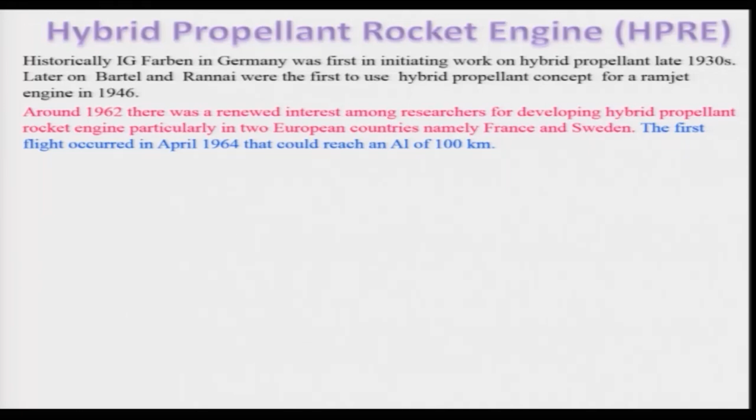After that a lot of work has been done, and developed countries like the USA and Russia and other countries started working on hybrid propellant rocket engines, but I will just mention a few of their milestones. The largest hybrid rocket engine was built around the mid 1980s by AMROC, designed for a space booster using the H500 engine, which could produce a thrust of 312 kilonewton lasting for 70 seconds, and they used liquid oxygen and HTPB propellant in that engine.

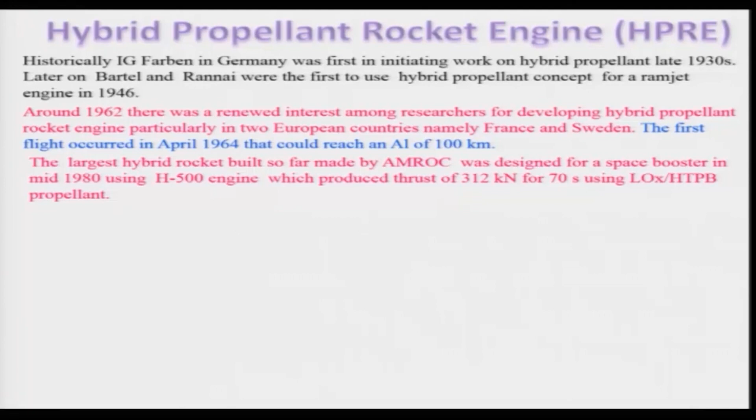There are several programs on hybrid propellant rocket engines across the globe, but unfortunately they are not really being used very much by various space agencies. Let us look at a schematic of a typical hybrid propellant rocket engine shown in this diagram. This is your hybrid propellant rocket engine system.

It has various components like a nozzle, and there is the motor grain, and this portion is your fuel grain, and this portion is your port where the gases will be passing through, and it has injectors, and this total is known as the combustion chamber. The combustion chamber also contains the igniters, and there will be an injector which is not shown here, and the combustion chamber is connected to a feed system.

We have already discussed the feed system in the case of the liquid propellant rocket engine. It is similar to that. Generally, a very simple system is used in this case, as only one liquid line has to be designed. The liquid oxidizer is contained in a tank, and it has to be pressurized using the gas pressure feed system, and this is your gas pressurization tank.

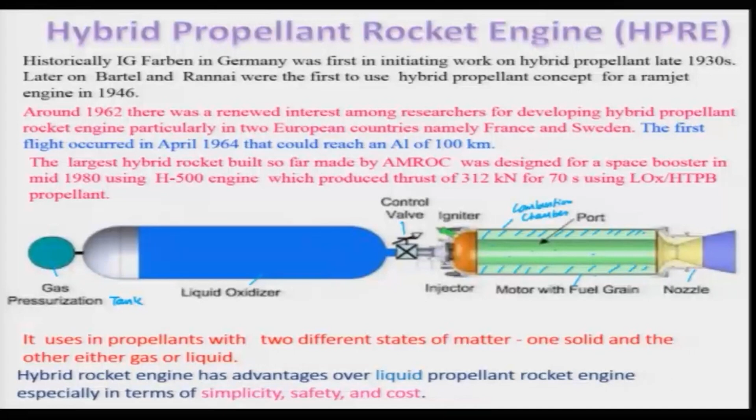So, as I told earlier, the hybrid rocket engine has advantages over the liquid propellant rocket engine, especially in terms of simplicity, safety and cost, as it has fewer components as compared to the liquid propellant rocket engine. Let us now look at the characteristic features of a hybrid propellant rocket engine.

The specific impulse of the hybrid propellant rocket engine lies above the solid propellant engine. However, it will be lower than the maximum value of the liquid propellant rocket engine. And its specific impulse varies even during steady state operation, because of the fact that there will be variation of the oxidizer and fuel mixture ratio along the length and also along the time.

And that is really one of the problems one has to look at, and it has the ability to change the thrust level smoothly over a wider range as compared to the solid propellant rocket engine. Its operation can be switched off and on easily during flight, unlike the solid propellant rocket engine. It has relatively lower system cost as compared to the liquid propellant rocket engine.

It has a higher safety envelope during the storage of propellant and operation of the rocket engine as compared to the solid propellant rocket engine and liquid propellant rocket engine. Its propellant utilization is much lower than that of the solid propellant rocket engine, as a certain sliver of the fuel propellant remains unutilized at the end of its operation.

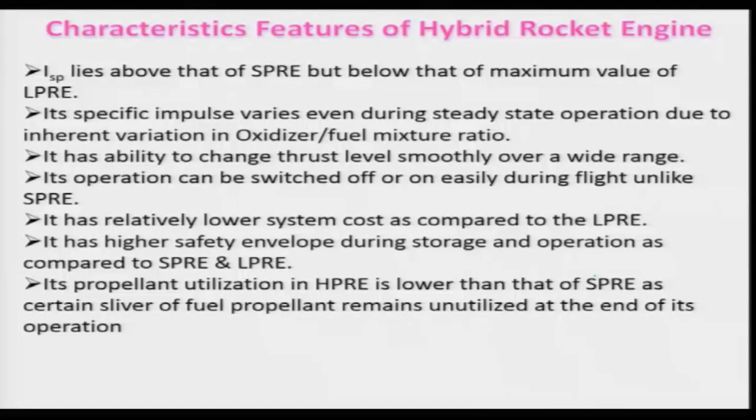So, let us look at a schematic of a typical hybrid propellant rocket engine. I just want to discuss a little bit again. Of course, it will have a combustion chamber with a CD nozzle, and you can see this is your solid propellant grain, and this is the port through which the oxidizer will be coming.

This is your injector plate through which the liquid will be atomized, being fed by the feed system, and there is a spray. Of course, there is an igniter which will ignite the combustion in this combustion chamber. But keep in mind there is another component, known as the mixing chamber, which will not be there in a liquid propellant engine, and that is very important because the fuel and oxidizer have to be mixed and burned properly before getting expanded in the CD nozzle.

Of course, it has a controlling valve as a part of the feed system, and the liquid oxidizer tank has a pressure regulating valve and the high pressure gas tank, and that will dictate how long one can operate this engine. And there is a diaphragm, as I told, and that will separate the liquid oxidizer tank from the high pressure gas, which happens to be inert gas. Generally, inert gas is used.

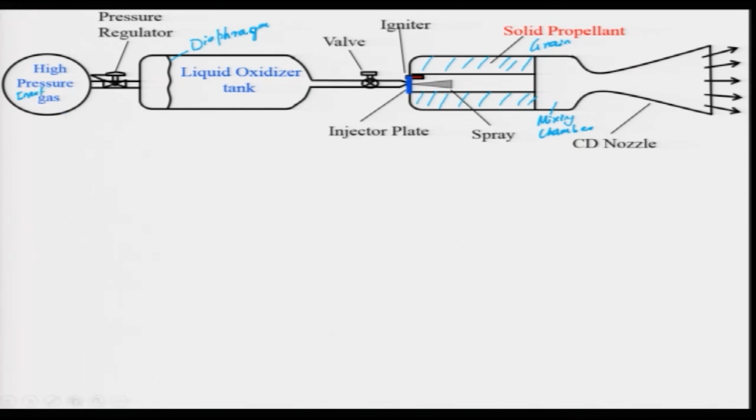And let us look at different kinds of propellants that can be used for a hybrid propellant rocket engine. Some of the fuels being used are polymers, polyethylene, HTPB, that is hydroxyl-terminated polybutadiene, CTPB, paraffins, and several others, and whatever can be used as a fuel in a solid propellant can be used. Whereas the oxidizer generally used is a liquid oxidizer: hydrogen peroxide, nitrogen tetroxide, white fuming nitric acid, red fuming nitric acid, and several others.

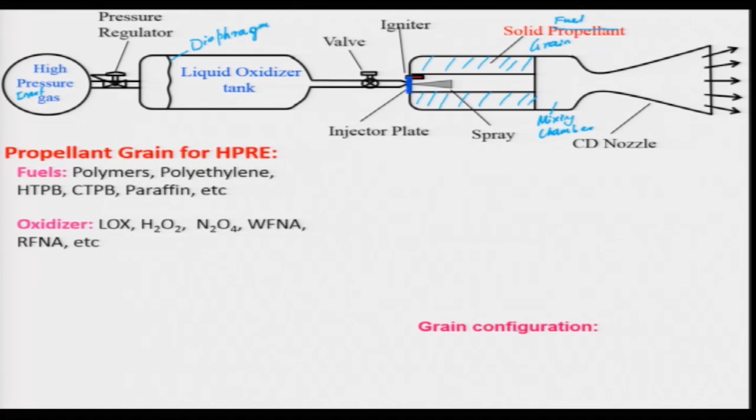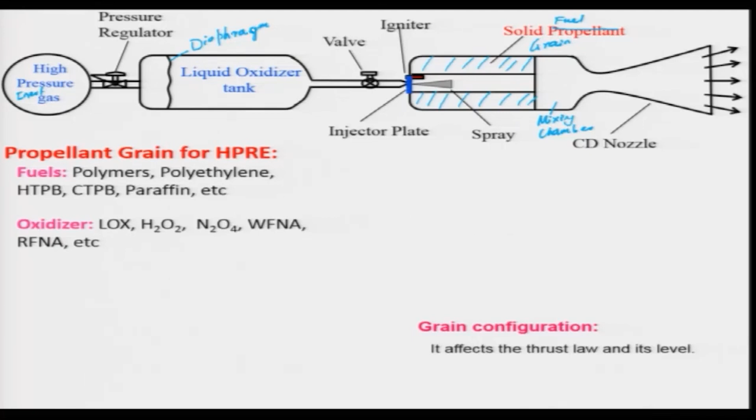And as I told earlier, we need to have the grain, your solid fuel grain. This is basically the solid fuel grain, and the grain configuration will be playing a major role so far as the performance of the hybrid propellant rocket engine is concerned, because it will be dictating the burning surface, and hence it affects the thrust law and its level of producing the thrust.

And let us consider a cylindrical solid fuel grain which is shown here, and in this case this is your oxidizer, and as a result the propellant will be burning in these directions, and the thrust level will be limited by that, and it will be dependent not only on the diameter of this solid fuel grain, but also on the length, and this is your length.

So, if you want to have a higher thrust and the diameter of the engine is limited due to some reason, then naturally one can get higher thrust by increasing the length. So, that is the limitation of the cylindrical solid fuel grain. Hence, the single port grain is not preferred in case of hybrid propellant rocket engine, particularly for high thrust level engines, as its regression rate is almost 3 times less than that of the solid propellant rocket engine. So, therefore, the multi port fuel grain is being designed and developed.

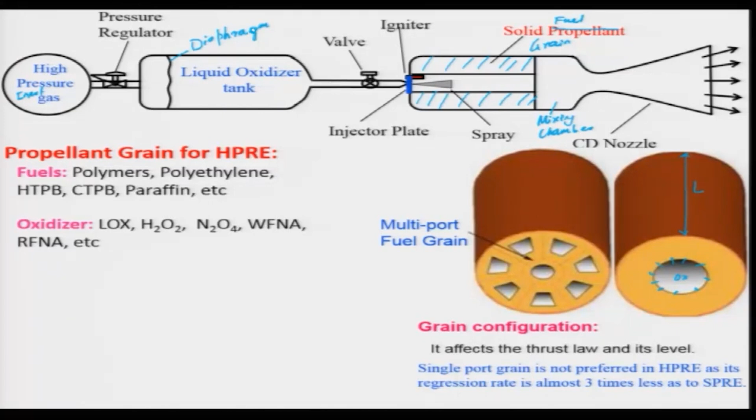So, let us look at a typical multi port fuel grain, and this is having a port at the center, and these are the other side ports having basically a truncated shape, or we call them pie shaped combustion ports. And keep in mind, this is known as web, and if you look at it, the thickness of the web is double here in this case, and when it is burned, naturally this surface will be moving perpendicular to that, and there will also be a round one, and this is the way it will be moving.

Now, the web spacing here to there has to be properly done, and in case these are meeting, this also will be moving in a circular manner, it goes on increasing, moving in the opposite way in this pie shaped combustion port. Naturally, a situation will come that it will be structurally very weak, because it is thinning down towards the end, and it may lead to some kind of falling down on the port itself. So, therefore, one has to be careful in designing these kinds of multi port fuel grains. And for that, of course, one can use a separator kind of thing, so that it will give structural rigidity, that we will be discussing a little later on.

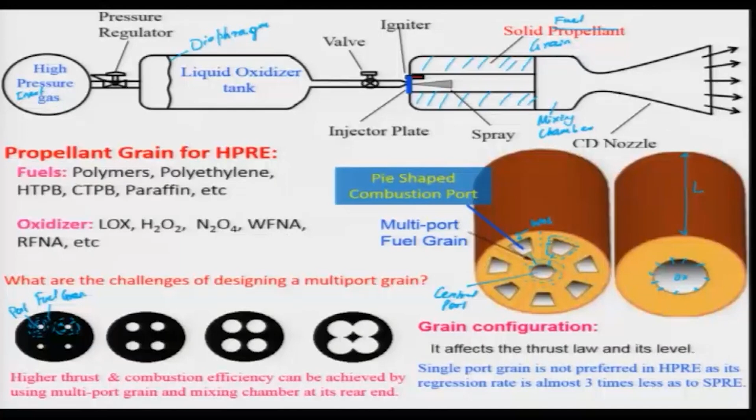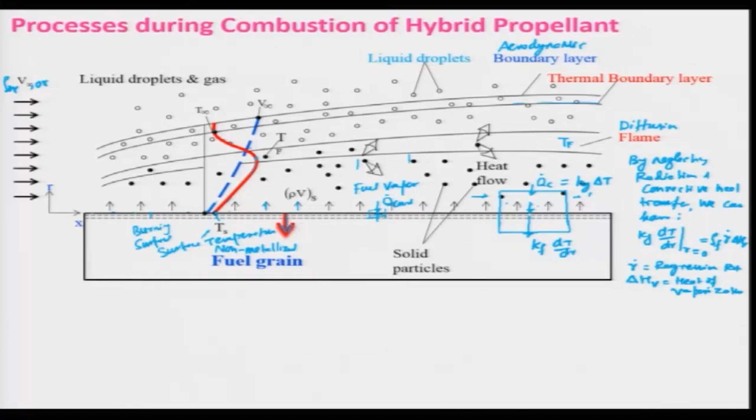And one can also solve the boundary layer equations for energy and for fluid flow, and then derive an expression for regression rate, which is quite complex. But we will look at the experimental results, because the processes are quite complex to model, and people have conducted experiments and come up with a semi-empirical relationship for the regression rate, that is r dot = C G^m, where G is the total mass flux, equal to rho_g v_g, the density of the gas times the velocity of the gas, m is the mass flux coefficient, and C is a constant.

This is a very generic relationship for the regression rate, and for polyethylene and hydrogen peroxide, r dot is equal to 8 G^0.45 centimeter per second. Keep in mind that this is valid for characteristic velocity of 1530 to 1590 meter per second, equivalence ratio phi of 0.1 to 0.2, and chamber pressure of 3 megapascal. So, you cannot really use it for other cases.

Whereas the more elaborate semi-empirical relation for the regression rate is rho_f r dot = 0.038 G Re_x^-0.2 B^0.23, where G is your total mass flux, and B is the ratio of delta h divided by delta H_v. Keep in mind that delta h is the enthalpy difference between the fuel surface and the flame, and delta H_v, as I told earlier, is the heat of vaporization. This is known as the blowing ratio.

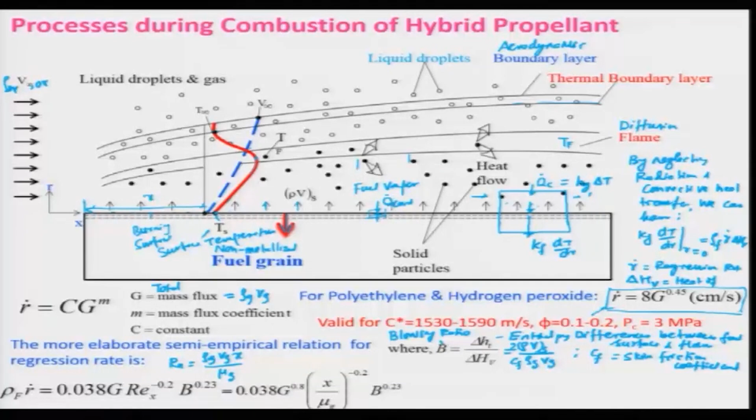If the mass flux increases, the regression rate will also increase, and it will be inversely proportional to the density of the fuel. It is also weakly dependent on the blowing ratio. So, it is quite a complex relationship as compared to the solid propellant relationship for the regression rate. So, with this we will stop here.

In the next lecture, we will be discussing more aspects of the hybrid propellant rocket engine.